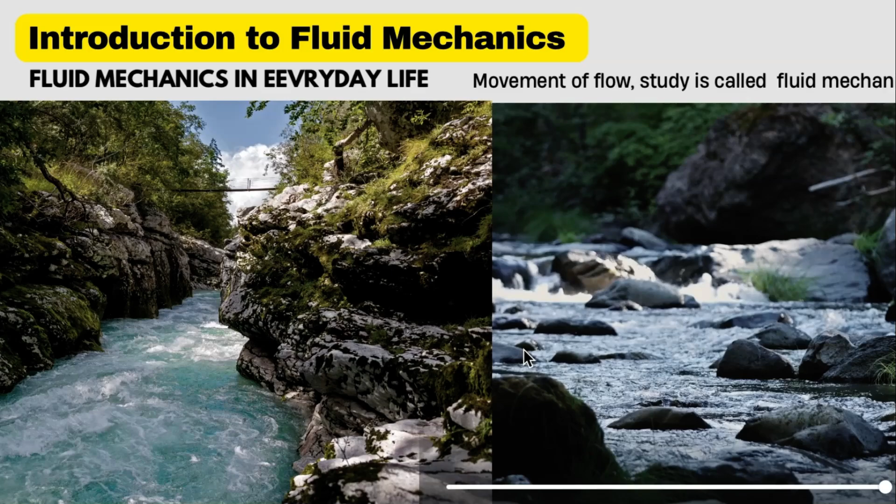So let's start and dig a little bit and speak about the beginning of fluid mechanics. The science of flow has been classified into hydraulics, which developed from experimental studies, and hydrodynamics, which developed through theoretical studies. In recent years, however, both have merged into the single discipline called fluid mechanics.

Prehistoric relics of irrigation canals were discovered in Egypt and Mesopotamia, and it has been confirmed that canals had been constructed more than 4,000 years BC. Water in cities is said to have begun in Jerusalem, where a reservoir to store water and a masonry channel to guide the water were constructed. Water canals were also constructed in Greece and other places.

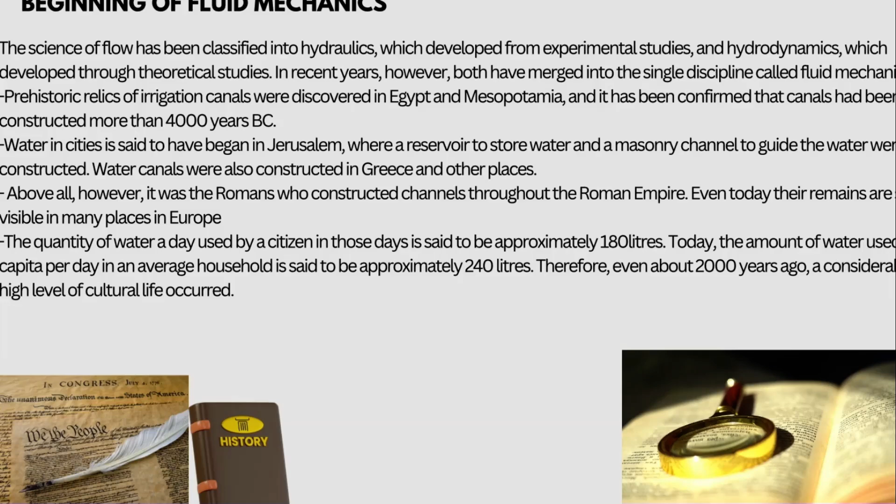Above all, however, it was the Romans who constructed channels throughout the Roman Empire. Even today, the remains are still visible in many places in Europe. The quantity of water a day used by a citizen in those days is said to be approximately 180 liters. Today, the amount of water used per capita per day in an average household is said to be approximately 240 liters. Therefore, even about 2000 years ago, a considerably high level of cultural life occurred.

Before proceeding to describe the development of hydraulics, the Renaissance period of Leonardo da Vinci in particular should be recalled. Popularly, he is well known as a splendid artist, but he was an excellent scientist too. He was so well versed in the laws of natural science that he stated that a body tries to drop down onto the earth through the shortest path, and also that a body gives air the same force as the resistance which air gives the body. These statements preceded Newton's law of gravity and laws of motion, including the law of action and reaction.

Particularly interesting in the history of hydraulics is Leonardo's note, where a vast description is made of the movement of water eddies, water waves, falling water, the destructive force of water, floating bodies, efflux, and the flow in a tube conduit to hydraulic machinery. Leonardo was the first to find the least resistive streamlined shape. Indeed, Leonardo was a great pioneer who opened up the field of hydraulics. Excellent researchers followed in his footsteps, and hydraulics progressed greatly from the 17th to the 20th century.

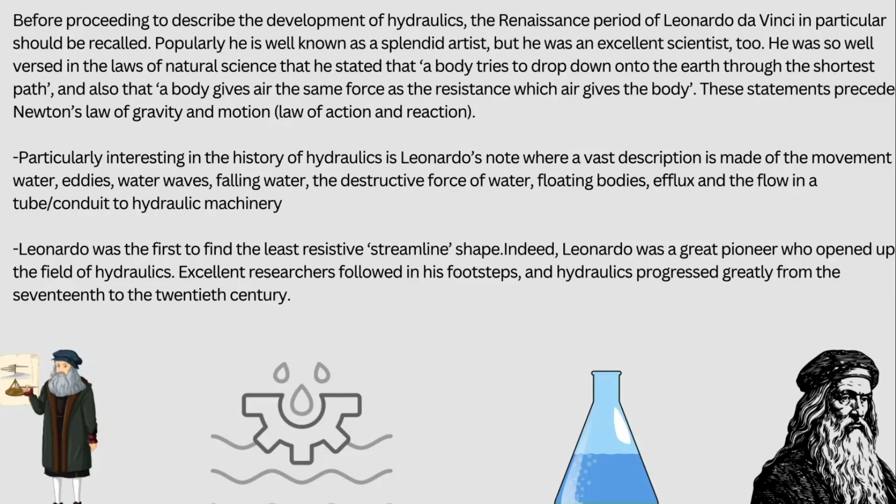Now we're going to be speaking about hydrodynamics particularly. On the other hand, the advent of hydrodynamics, which tackles fluid movement both mathematically and theoretically, was considerably later than that of hydraulics. Its foundations were laid in the 18th century. Complete theoretical equations for the flow of non-viscous, non-frictional fluid were derived by Euler and other researchers. Thereby, various flows were mathematically describable.

Nevertheless, the computation according to these theories of the force acting on a body or the state of the flow resulted in a very different outcome from the experimentally observed results. In the 19th century, however, it made such progress as to compete fully with hydraulics. One example of such progress was the derivation of the equation for the movement of a viscous fluid by Navier and Stokes. Meanwhile, in 1869, an important paper was published which connected hydraulics and hydrodynamics.

This was the report in which Kirchhoff, a German physicist, computed the coefficient of contraction for the jet from a two-dimensional orifice. The value coincided very closely with the experimental value for the case of an actual orifice, 0.60. Furthermore, in the present age, with the progress in electronic computers and the development of various numerical techniques in hydrodynamics, it is now possible to obtain numerical solutions of the Navier-Stokes equation. Thus, the barrier between hydraulics and hydrodynamics has now been completely removed, and the field is probably on the eve of a big leap into the new age.

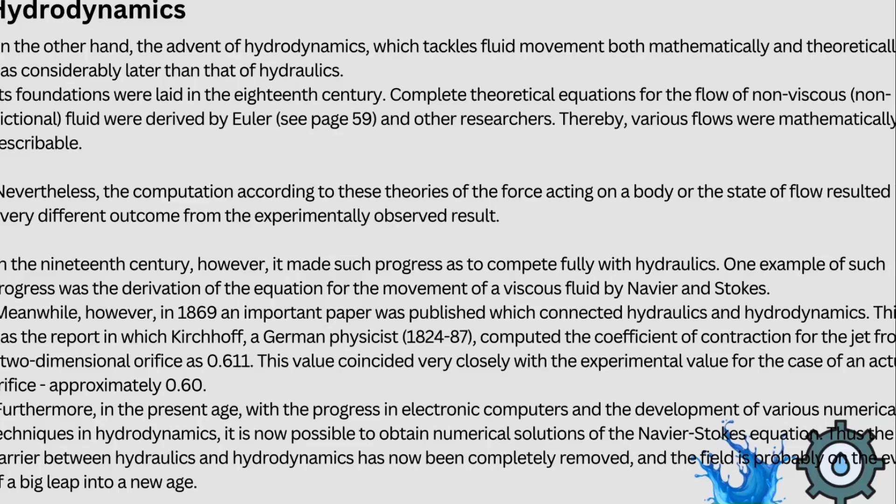Now comes the most interesting part of our lecture, the characteristics of fluids. Fluids are generally divided into two things, liquids and gases. A liquid is hard to compress, and as in the ancient saying, water takes the shape of a vessel containing it. It changes its shape according to the shape of its container with an upper free surface.

Gas, on the other hand, is easy to compress and fully expands to fill its container. There is thus no free surface. Consequently, an important characteristic of a fluid from the viewpoint of fluid mechanics is its compressibility. Another important characteristic is its viscosity. I'm going to speak about the equations later on for both.

Whereas a solid shows its elasticity in tension, compression, or shearing stress, a fluid does so only for compression. In other words, a fluid increases its pressure against compression, trying to retain its original volume. This characteristic is called compressibility. Furthermore, a fluid shows resistance whenever two layers slide over each other. The characteristic is called viscosity.

In general, liquids are called incompressible fluids, but gases are compressible fluids. Nevertheless, for liquids, compressibility must be taken into account whenever they are highly pressurized, and for gases, compressibility may be disregarded whenever the change in pressure is small.

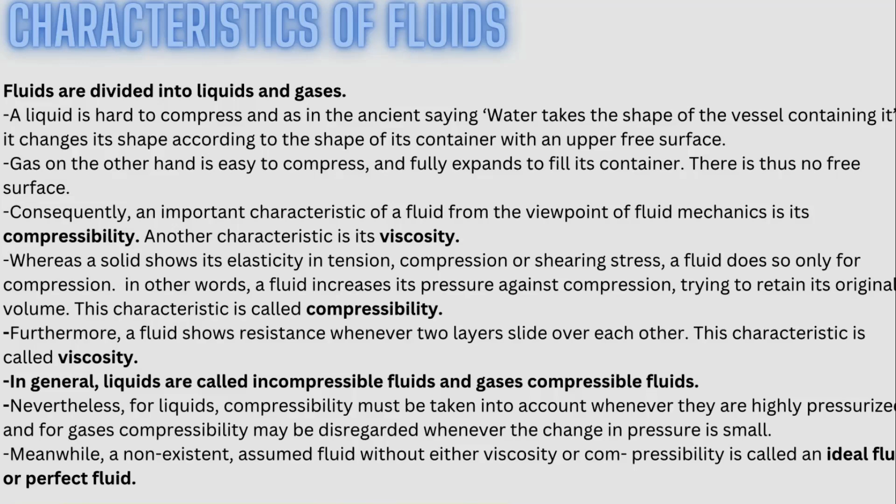Meanwhile, a non-existent assumed fluid without either viscosity or compressibility is called an ideal fluid or a perfect fluid. A fluid with compressibility but without viscosity is occasionally discriminated and called a perfect fluid too. Furthermore, a gas subjected to Boyle's-Charles law is called a perfect or an ideal gas.

Now I'm going to be speaking about the units and dimensions. All physical quantities are given by a few fundamental quantities or their combinations. The units of such fundamental quantities are called base units. Combinations of them are called derived units. The system in which the length, mass, and time are adopted as the basic quantities and from which the units of other quantities are derived is called the absolute system of units.

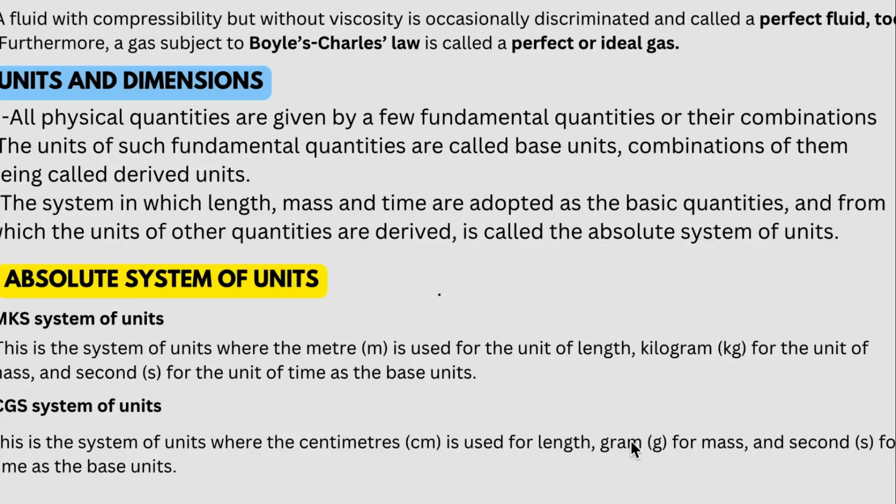In the absolute system of units, we basically have three main types. We have the MKS system of units, the CGS system of units, and the SI system of units, which stands for Système International. The MKS system of units is the system where the meter is used for length, kilogram for mass, and seconds for time as the base units. The CGS system of units uses centimeters for length, gram G for mass, and second S for time as the base units.

The Système International unit system is an international system developed from the MKS system of units. It is a consistent and reasonable system of units which makes it a rule to adopt only one unit for each of the various quantities used in fields of science, education, and industry. I basically use SI units for all the dimensions and units of my physical quantities.

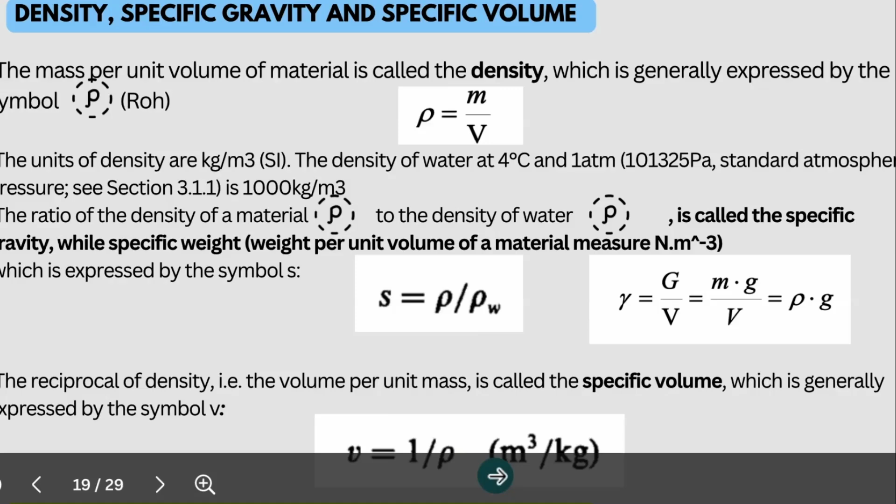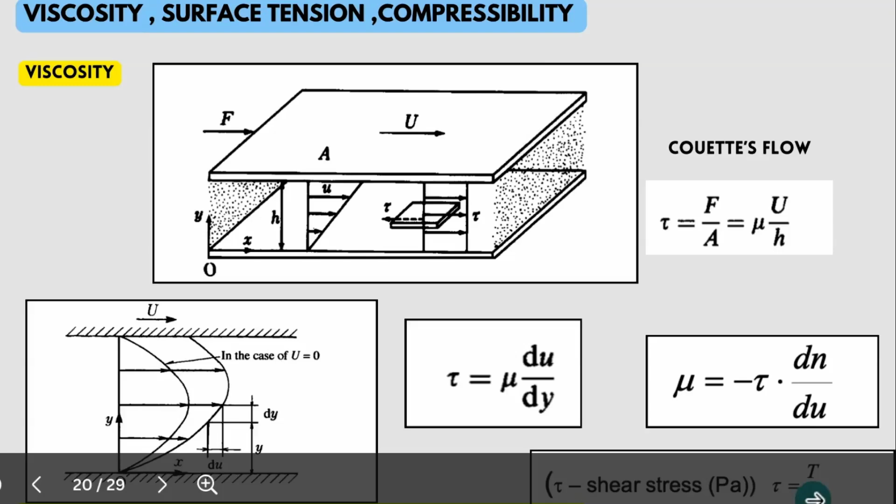In university lectures, we can rewrite this equation into this form, which is μ equal to the shear stress over du/dy. If a fluid with viscosity of 1 Pa·s is placed between two plates and one plate is pushed sideways with a shear stress of 1 Pascal, it moves a distance equal to the thickness of the layer between the two plates in 1 second, as I have explained here. And we can say that the shear stress is equal to F over the area.

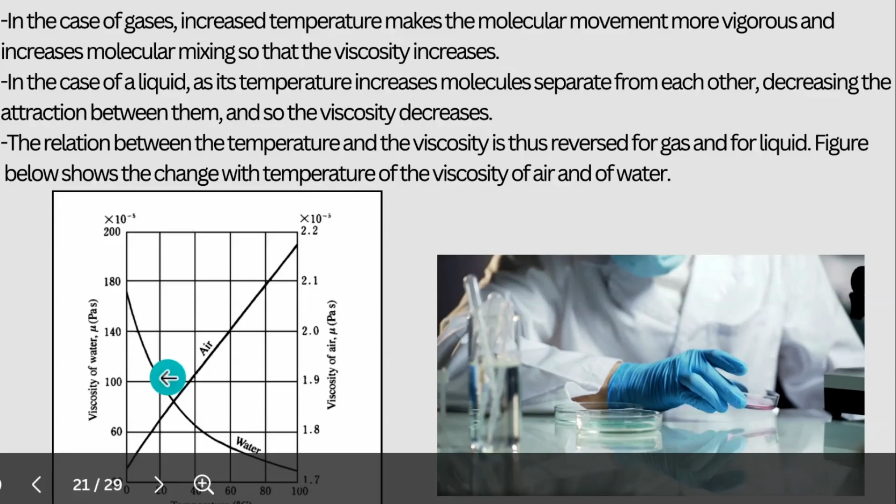In the case of gases, increased temperature makes the molecular movement more vigorous and increases molecular mixing so that the viscosity increases. In the case of a liquid, as its temperature increases, molecules separate from each other, decreasing the attraction between them, and so the viscosity decreases. The relationship between temperature and viscosity is thus reversed for a gas and for a liquid. This figure shows the change with temperature of the viscosity of air and water.

The units of viscosity are Pascal seconds in SI units and g/(cm·s) in the CGS absolute system of units. And 1 g/(cm·s) in the absolute system of units is called 1 poise. The value ν obtained by dividing viscosity by the density ρ is called the kinematic viscosity. For water, oil, or air, the shearing stress τ is proportional to the velocity gradient du/dy. Such fluids are called Newtonian fluids.

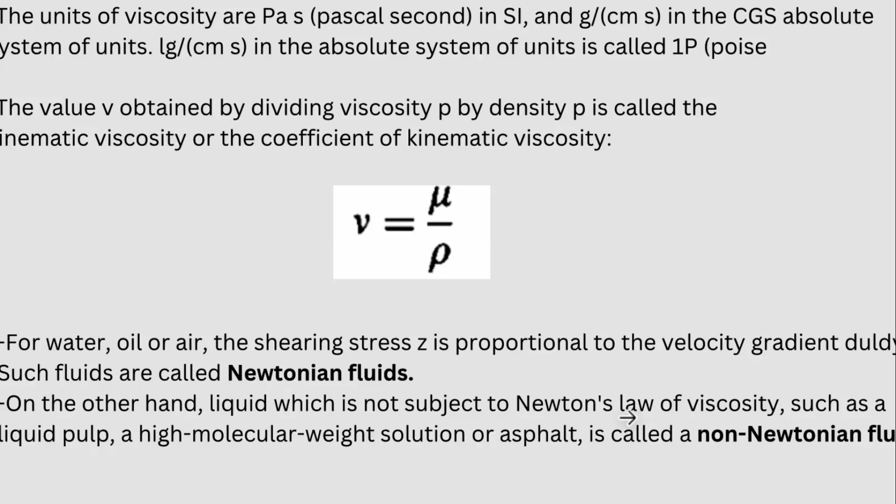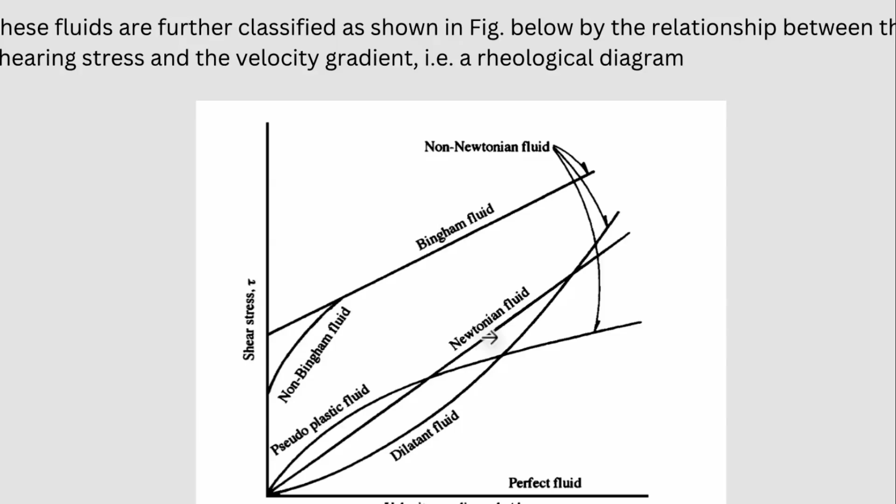On the other hand, a liquid which is not subject to Newton's law of viscosity, such as a liquid pulp, a high molecular weight solution, or asphalt, is called a non-Newtonian fluid. These fluids are further classified as shown here by the relationship between the shearing stress and the velocity gradient, a rheological diagram. Rheology is basically the science of the deformation and the flow of a substance.

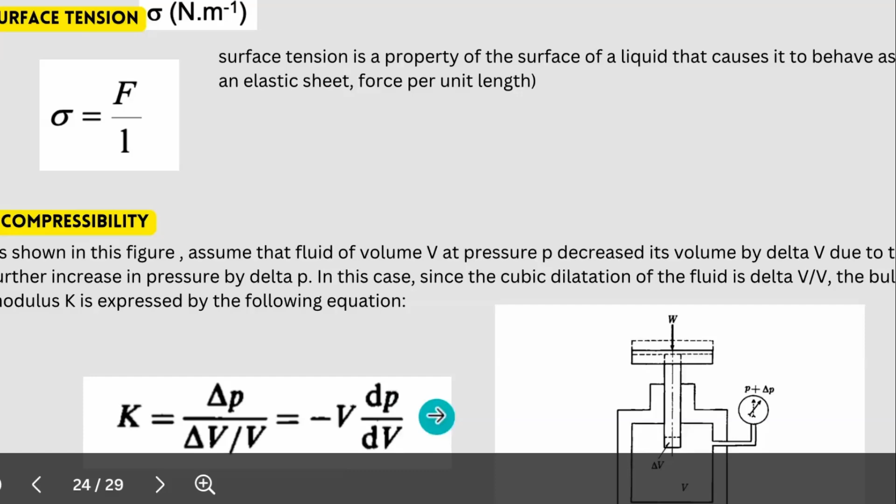In this case, since the cubic dilatation of the fluid is ΔV over V, the bulk modulus K is expressed by this equation right here, change of P divided by delta V over V. It is expressed by the derivative dP over dV. Its reciprocal β is called compressibility, whose value directly indicates how compressible the fluid is. So β, 1 over the previous equation, is called compressibility. In other words, we can rewrite this formula as the following, which is the coefficient of volume compressibility.

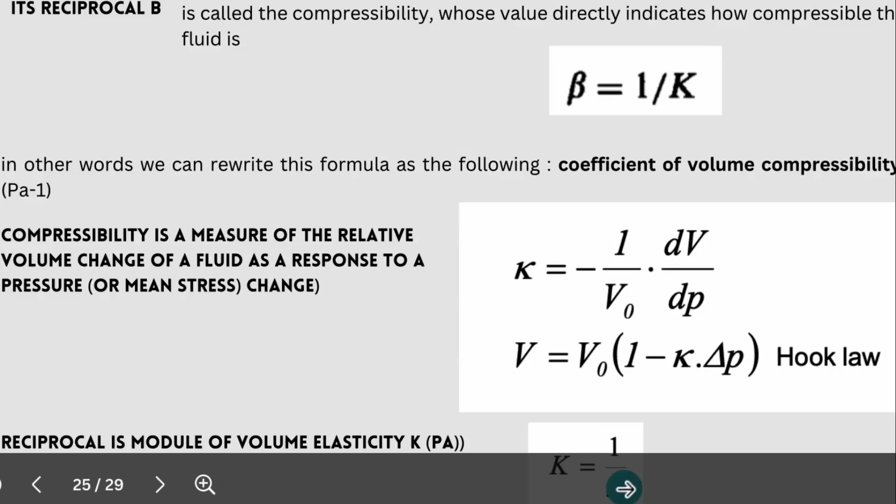In some lectures, they do not give you the previous derivation. They just write that compressibility is equal to minus 1 over V times dV over dP, which is a measure of the relative volume change of a fluid as a response to pressure. And this equation is Hooke's law. I'm sure all of you know Hooke's law from your physics classes, which is this equation right here: V equals V0 times 1 minus κ, the coefficient of volume compressibility, times the change of pressure. The reciprocal is the modulus of volume elasticity K, which is equal to 1 over the coefficient of volume compressibility.

Now I'm going to be speaking about the coefficient of volume expansion. Thermal expansion is the tendency of matter to change in volume in response to a change in temperature, which is indicated in this equation right here. It shows that V is equal to V0 times 1 plus β times the change of temperature.

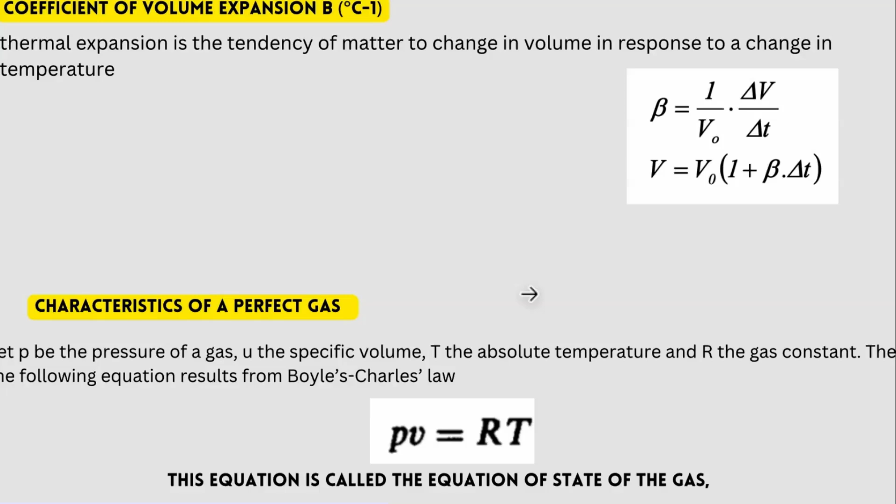Characteristics of a perfect gas. Let P be the pressure of a gas, v the specific volume, T the absolute temperature, and R the gas constant. Then the following equation results from Boyle-Charles law: Pv equals RT. This equation is called the equation of state of the gas. A gas subject to this equation is called a perfect gas or an ideal gas. Strictly speaking, all real gases are non-perfect gases. However, any gas at considerably higher temperature than its liquefaction temperature may be regarded as approximately a perfect gas.

This shows the state change of a perfect gas. So here we have pressure versus the specific volume. The change in the state of a perfect gas is expressed by the following equation, where PV to the power of n is constant, where n is called the polytropic exponent, as this value changes from 0 to infinity, as shown here in this figure right here.

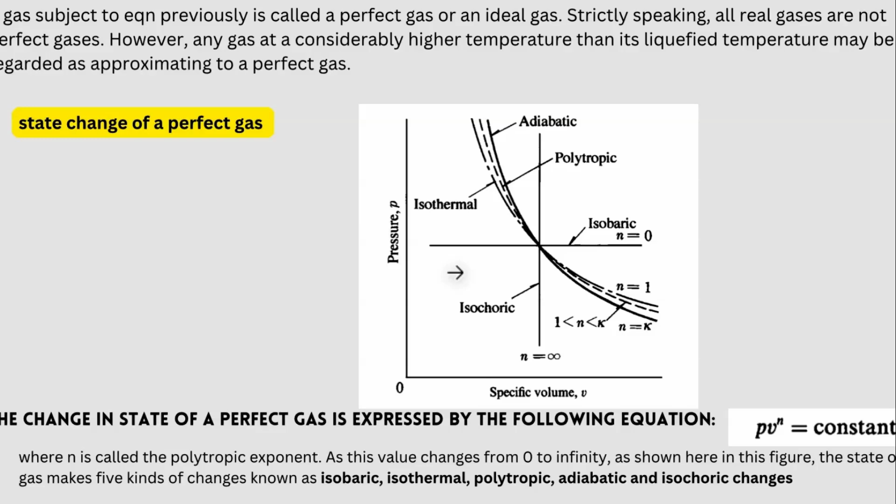The state of the gas makes 5 kinds of changes, known as isobaric, isothermal, polytropic, adiabatic, and isochoric changes. Those are all the changes of the gas. Now let's move on to our problem.

So a pipeline is examined by pressure test at which the pressure reached this value, pascals. The pressure was in a pipeline of this length with a diameter 250 millimeters at the beginning of the pressure test, at which the temperature was 5 degrees Celsius. Determine the pressure at the end of the test when the temperature of the water was 15 degrees.

Neglect the deformation of pipe walls. For the coefficient of thermal expansion of water at the temperature 10 degrees, consider the value of 1.4 times 10 to the power of minus 5 per degree Celsius. The modulus of volume elasticity of water is equal to 2 times 10 to the power of 9 pascals. So you will evaluate all of these values with your parameter of x. Let's say your x is equal to 1 or 2, and then you will get these values. All of the rest are given values.

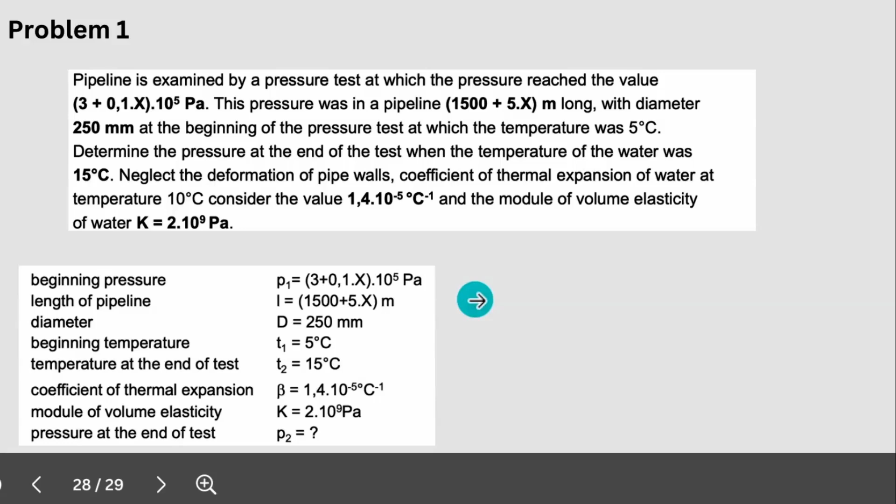So we know that the change of P is equal to P2 minus P1, and delta T is equal to T2 minus T1. So the volume at the end of the test is equal to the volume at the beginning of the test, open brackets, 1 minus compressibility times the change of pressure. And we know that the volume at the end of the test is equal to the volume at the beginning of the test, 1 plus beta times the change of T. Those are our equations that we stated previously for the thermal expansion right here, if you remember.

So proceeding, now we know that the volume at the end of the test is equal to the volume at the beginning of the test, 1 plus beta times the change of the temperature. And we know that the volume at the beginning of the test is equal to the volume at the end of the test, 1 minus the compressibility times the change of P. So if we substitute this equation for the volume at the end of the test, we will have V beginning of the test, 1 plus beta times change of T, open brackets, 1 minus compressibility times the change of P. These two will cancel each other out.